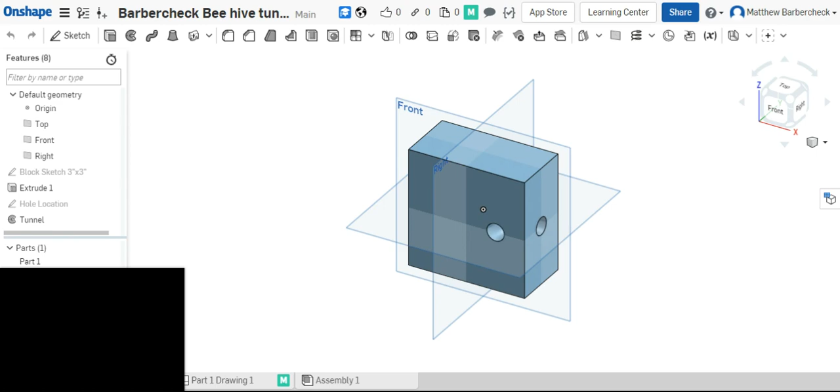You've got hearing and eyesight. You're lucky. You're an amazing individual. You're healthy enough to perform this task. Good for you. Let's get down to it.

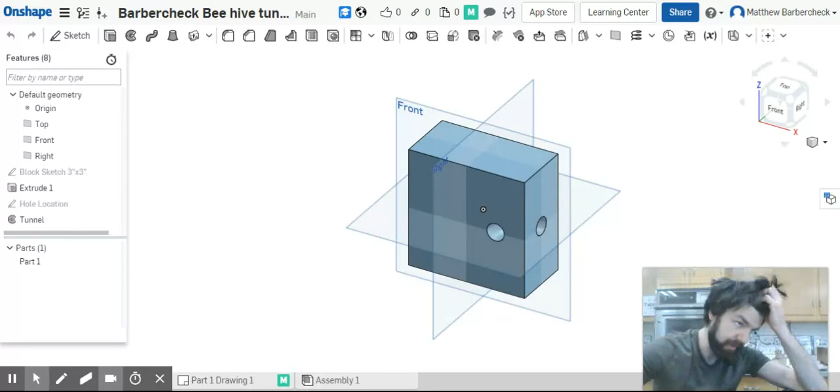This video is going to cover the dimensioning of the block you're looking at right now. So there are a couple prior videos that show you how to make this. Video one is, and I'm going to steal some terminology I saw in the comment section on another YouTuber's channel, a more rendering approach, meaning you were just creating the physical representation of the object.

But the second video covers what if you are doing it from a design approach, and that means how easy is it to go back in and edit changes if you need to scale the design up or scale the design down. A lot of design has relationships established as far as bolt patterns go, or certain things go, that when you go back to change them, if you go about the process correctly, you'll be able to just change things very, very quickly. So you'll have to go back and watch those videos.

It's very, very hard for me to describe this. Honestly, I don't come straight from industry doing this. I ask and talk to a lot of people doing this. I've done most of my CAD work through the educational setting, some professional, but not very much. And so it's hard for me to describe. You'd have to go back and watch those. And if you are from industry, please correct me if you need to. Again, these videos are going out to students, and I find it very important to get the most authentic information into their hands. So let's get straight down to dimensioning this project.

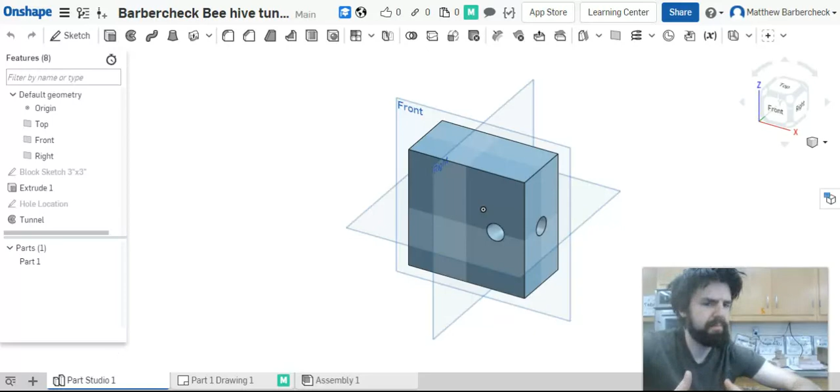And so I've got my Screencastify tools in the way again. Pull this file up. If for some reason the numbers are different because of another activity where we've either scaled it up or down, don't worry about it. The main point of this video is not that your numbers match my numbers, but your practices match my practices for dimensioning. Because when we create a dimension, a plan, a print, which is what you're about to do for this part, remember that print should be able to go to a non-English speaker. That non-English speaker, if they've got any print reading experience, will be able to take that print and fabricate their part. And that's why some people argue that drafting can substitute as a foreign language in some academic institutions.

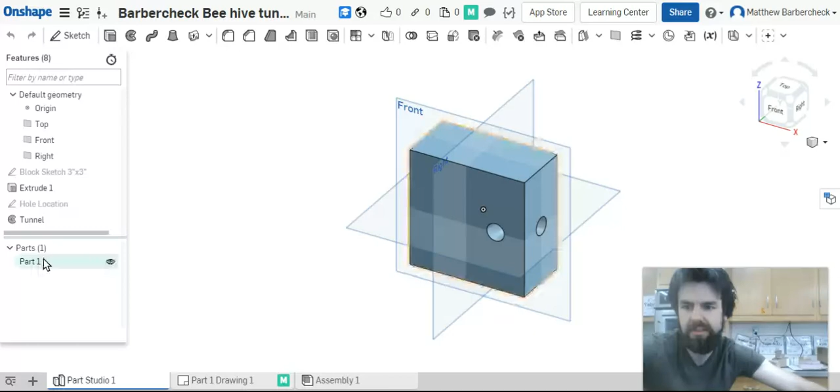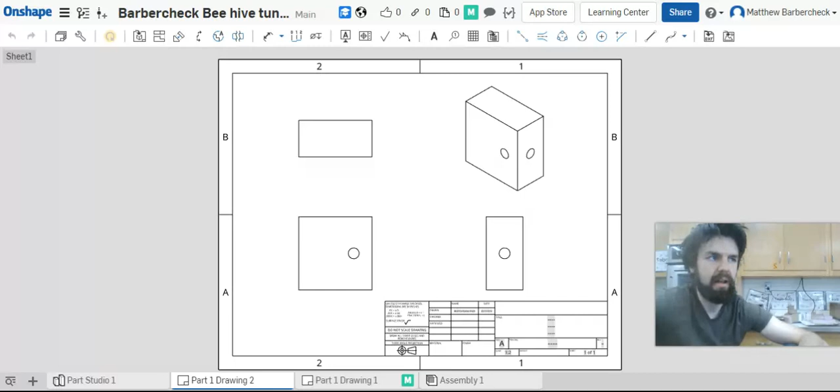So the quickest way to make part drawings: right click and select create drawing of part one. And the nice thing about doing it this way is you can select 4 views and it will automatically give you those 4 views. And now I'm in the way. Get out of the way, Barbercheck. All right, once this plan comes up, what we're going to do is change one of the views. We're going to include all the dimensions we need to include, and then you're going to be set on dimensioning. So let's speed things along.

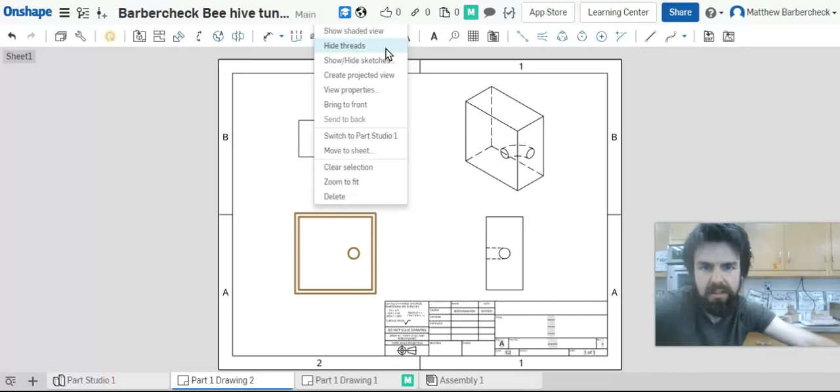First thing I want to do is turn on the hidden lines on this view. So just right click, select show hidden lines, and now you have these hidden lines. Just by looking at it, you should be able to conclude what hidden lines are. That's weird. Oh, it said hide hidden lines because I had 2 of them selected. So you could, I think, select all of these at once. There we go. And then just do this all at once. I suppose that would make sense.

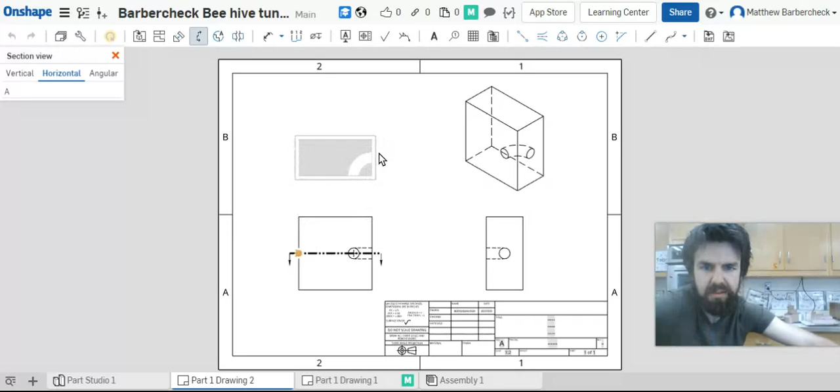Now this one, I'm not going to click show hidden lines, because instead I'm going to delete this view and add a section view. So this button right here, section view, you can pick what orientation you want your view to be broken in. And if you did our donut dimensioning video, then you know that what we're doing is essentially cutting this part in half. So pretend that this is a saw blade. Cut that in half, and the view we get is the same as the top view, only now, follow my mouse here, we get this top view looking straight down through the middle of that hole. And so that will make dimensioning the location of this arc a little bit easier.

All right, so it's a basic block. We definitely know we need length, width, and thickness. Let's add that in. We're going to do our length.

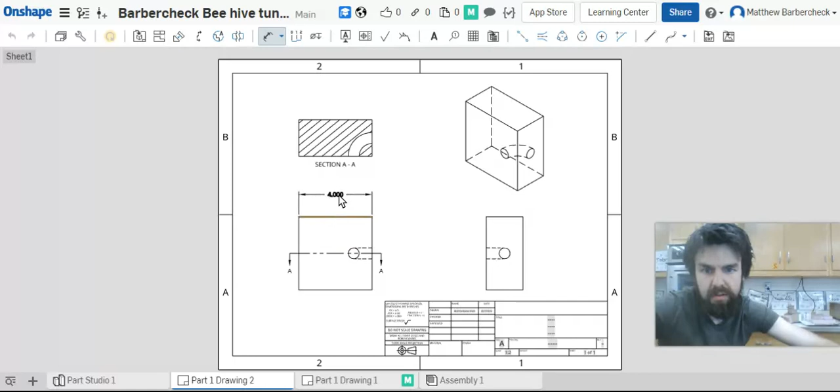And as a general rule of thumb, I was taught you want to be about 3 letter heights away at least. All right, so 4. Now, this is a square, right? I can come over here and dimension this, and I've got my length and my width.

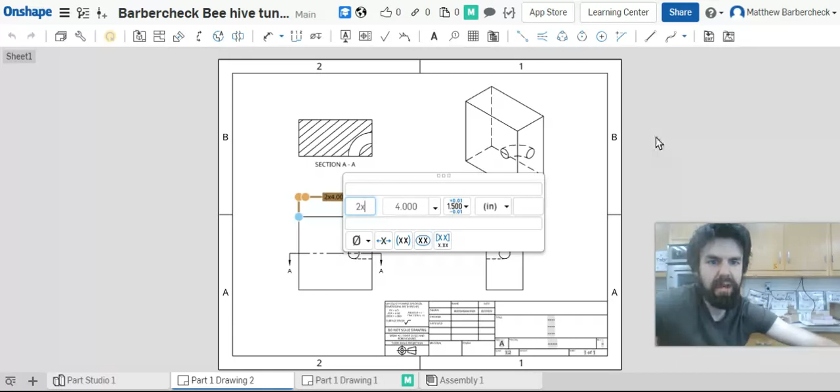Here's something we're going to do to save time and to imply that this part will always be a square for one reason or another. Just put 2x right there, and that tells you that the feature that's similar to that 4 is going to be 4 as well. So the width, which is a feature that's very similar to the length, the exact same in this case, is going to be also 4. So we got our length, our width.

Now all we need is our thickness or height, depending on how you think about it or how you're picturing things. And I'm going to go ahead and just, whoopsies, not use my section view because we already did that. And actually, this gets a little crowded to that guy right here. So I'm gonna go ahead and come over here because I know I'm gonna have to locate the hole and dimension it like so.

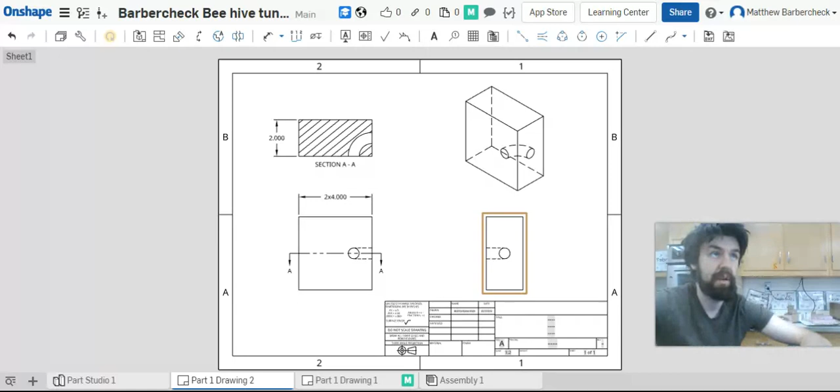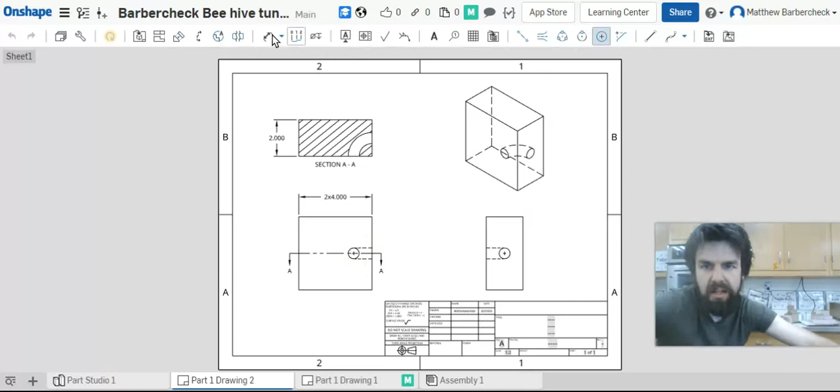All right, speaking of locating this hole, what we're going to do is just like plotting a point on a graph in your math class. You've got your X and your Y, and you've got your coordinates of parentheses 3, 2, knowing that means you go over 3 and up 2. We need to provide that same information to our fabricator, our machinist, our maker, our doer, whoever is putting this together. And so before I do that, I'm going to add a center mark to these holes. And then we're going to give them pretty much what would be an XY coordinate for locating these holes.

So right here, we know we're 1 inch away. And then we're going to go from here to here, and that we're 2 inches away. Now, this one was a little tricky for me to figure out just exactly what information we needed because of the arc and everything else. So again, if you're viewing this from an industry perspective, please offer your input.

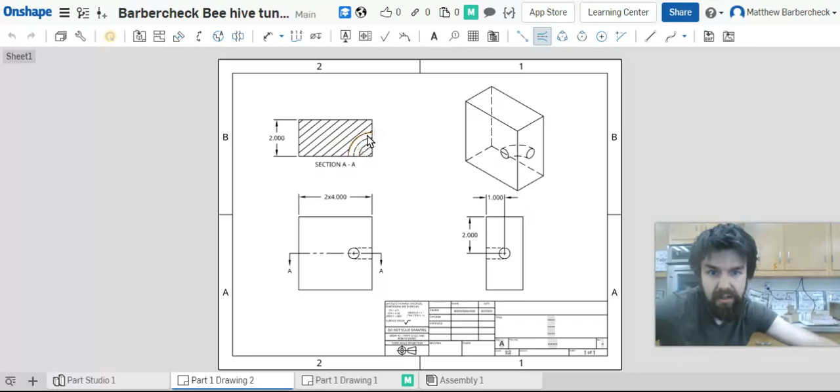However, I have concluded that we should be able to just do an edge-to-edge center line from here to here. We're going to drag that center line past the edge of the part, because typically center lines do that. We're going to give it a radius. Oopsies. All right, and then the only other thing we need, well, there's a couple things we need, but I'm going to go ahead and do this right here to cover my next talking point.

I'm including the diameter. All right, so now if we know the radius of this arc, this middle arc, and the diameter of this circle, by default we can figure out real easily what the inner radius is and what the outer radius is. With those two pieces of information, we get the same information. And then we're going to go ahead and locate this hole.

And the reason I'm going to locate this hole on this face is because we don't know how much of an arc this is. In theory it looks like a perfect 90-degree arc, but maybe it's a 95-degree arc, maybe it's a 98-degree arc. Either way, it would slightly change the location of its exit if that was the case.

So as best as I can tell, if I locate this hole, have this radius, and have the start hole located, it should tell me exactly what I need to know to fabricate that part. I can't think of any information that I'm missing. So I'm going to go ahead and do that. And then once you have this, remember you're just doing X and Y. So we're going to do our 1.

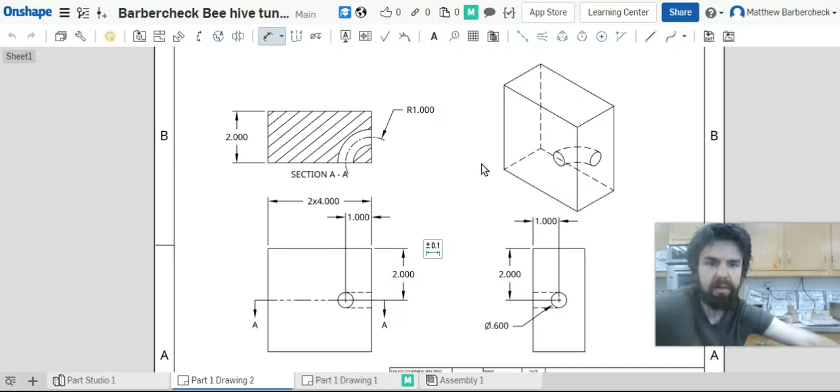Quick tip, never put a smaller dimension above a bigger dimension. You always kind of want to ladder down and not crowd too much. And then we're going to do the same here. And there we go. That should give us all the dimensions that we need.

So there it is. The second video on dimensioning the beehive tunnel, as we called it in the first video. And if you've got an industrial application for this, I was thinking coolant passageway, maybe.